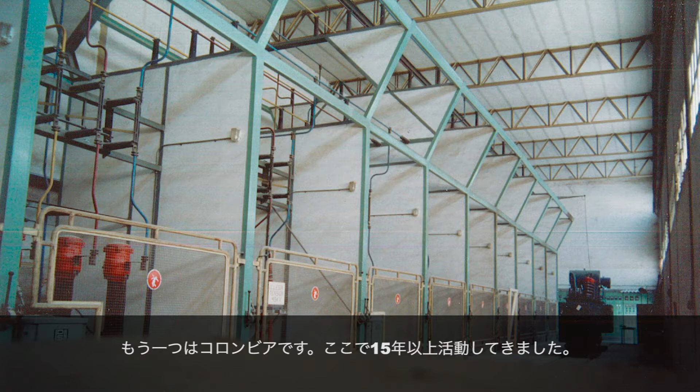Our two main places are one in the Basque Country, north of Spain, and the other in Colombia, where we have been present for more than 15 years. With more than 100 workers, EUSKABEA is present in every important sector of industrial construction.

This includes industrial installation, automatization, electrical engineering, tertiary sector, schools, hospitals, and distribution panel assembly. We have an in-house innovation department with the goal of harvesting all the knowledge of the long experience of our workers and developing new products.

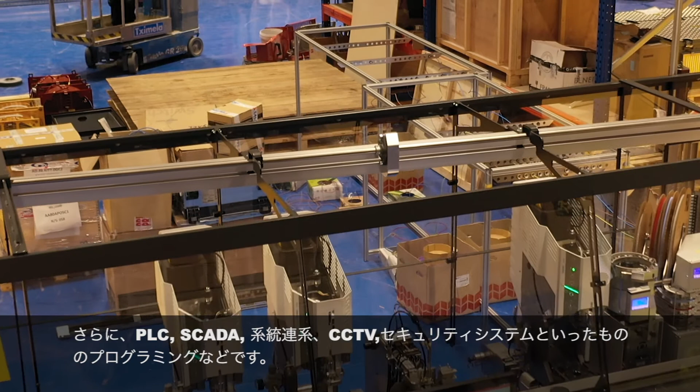EUSKABEA is a dynamic company with a cohesive list of providers and clients all around the world. We are well known for providing turnkey projects for big and small clients. We can provide the whole solution: engineering, technical design, installation, panel assembly, and programming with PLC, SCADAs, system interconnections, CCTV, security systems. We are a trusted partner, and our customers can vouch for that.

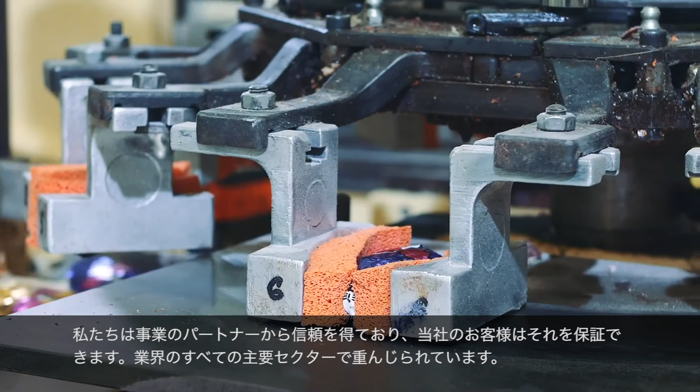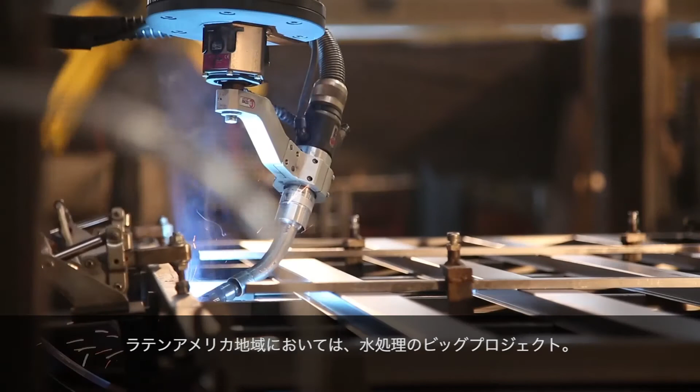We are present in all key sectors of industry: mobility and transport with big players like CAF, automotive with big players like Gestamp, CIE, Fagor de Iruna, water treatment systems with big projects in Latin America, and in the maritime sector with a team of 30 years of experience in shipbuilding.

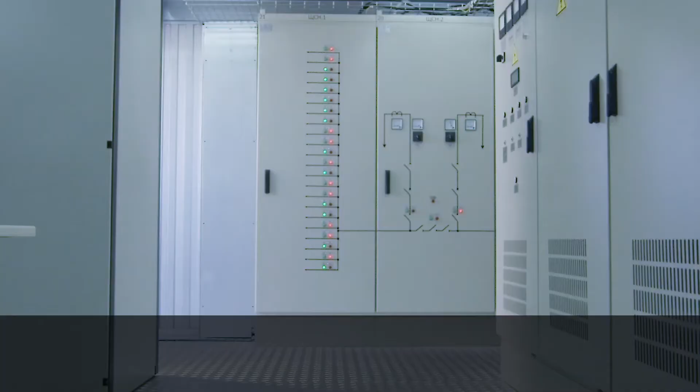But where EUSKABEA is most known is in renewables. With more than 300 references, we are a reliable company with very big experience, with over 80 hydroelectric power plants with big partners like Voith, Iberdrola or Andritz, 20 cogeneration plants, 15 solar power plants with around 200 megawatts installed power with Solaria, Gema, Oridom, and 10 wastewater management systems.

With experience having mounted so many power plants in the renewable sector, we also have a specialized team for substation construction. This team has constructed most of the substations for the plants mentioned before.

As proof of our in-house technology, we have SATINS. SATINS is a home-developed system that uses the strength of data management for predictive purposes. It's based on a philosophy of constant improvement, and these improvements are key, because we actively suggest how to make our clients' installations better.

It's a trusted service with more than 500 clients, fully developed by EUSKABEA teams, showing the strength of our collective experience and knowledge. We are hoping to make offers in Japan regarding renewable energies or substation installations, but we are open for any kind of business with everything we have said before.

With over 35 years of experience, EUSKABEA can be your key partner in this particular context of Fukushima or in any future ventures. Please visit our web pages and we will be happy to answer any questions or doubts you might have. Thank you for your attention.

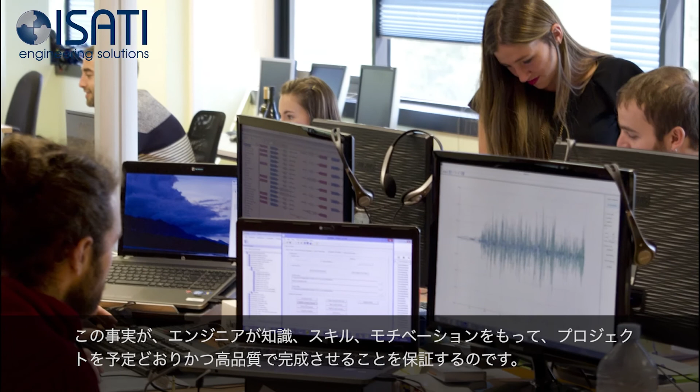During the same time, ISATI has provided engineering to leading wind energy companies as turnkey work packages completed in our engineering offices in Spain and as outsourcing at our customers' facilities. At ISATI, we take care of our engineers and ensure that the best people are selected to support our clients' projects. This ensures that engineers have the knowledge, skills, and motivation to complete projects on time and with the highest quality. ISATI is involved in both onshore and offshore projects, mainly on new wind turbine developments for clients like Siemens Gamesa and Adwen.

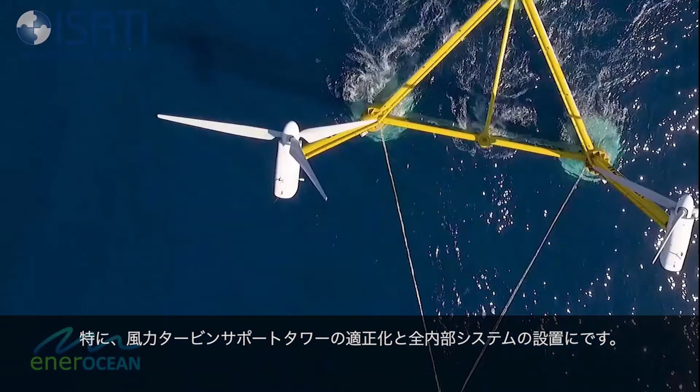ISATI is shareholder of Enerocean and deeply involved in the development of the W2 Power floating wind platform, in particular the optimization of the wind turbine support towers and the installation of all the systems within.

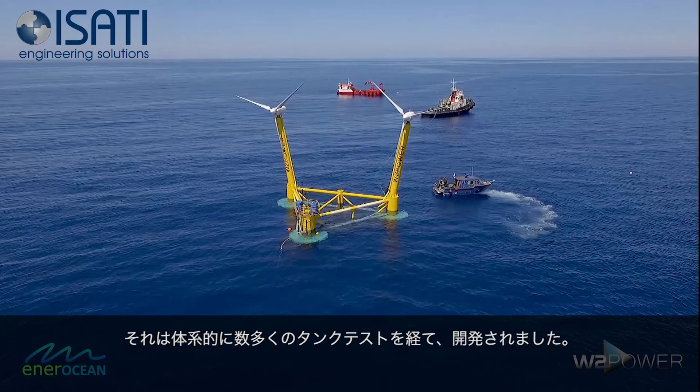W2 Power is a twin turbine platform with a steel semi-submersible floater which can deliver up to 12 megawatts on a single unit. It has been developed systematically, requiring numerous tank tests. The first TRL6 prototype was successfully tested in open seas last year.

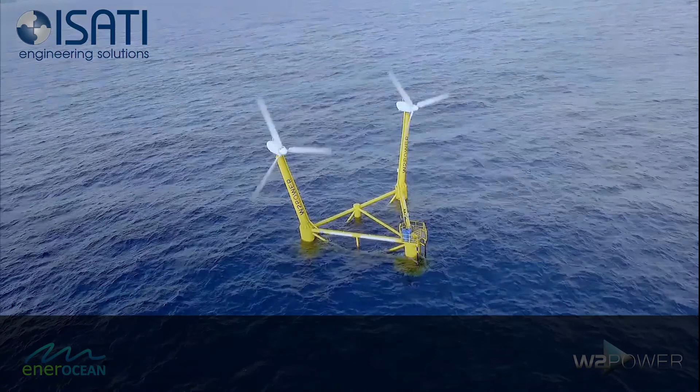ISATI has joined the recent acceleration in the transition in aviation towards hydrogen as a fuel. To contribute to this ambitious objective, ISATI has started a new project looking for solutions to storing hydrogen on aircraft and to producing hydrogen using offshore wind energy.

We are also developing our own health monitoring systems using guided waves to detect potential defects in aircraft and floating wind structures and assess structural integrity in real time.